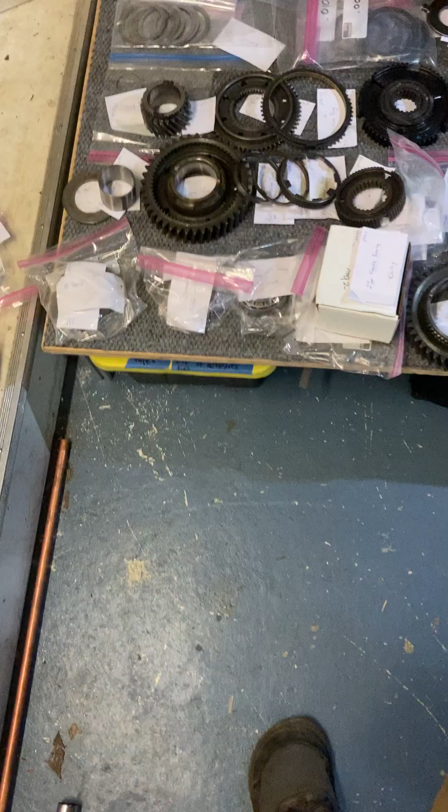Sorry, phone shut off. Okay.

This is the hub. That's the snap ring in there. Boom. Found it. You was lost. Now you're found. Main shaft bearing. Rear housing main shaft bearing. And that other thing says main shaft bearing race.

There we go. So I believe all four of these are different size bearings. And then main shaft bearing snap ring. Pretty thick snap ring. Now you need 3 more shift detents. Reverse sync hub detents.

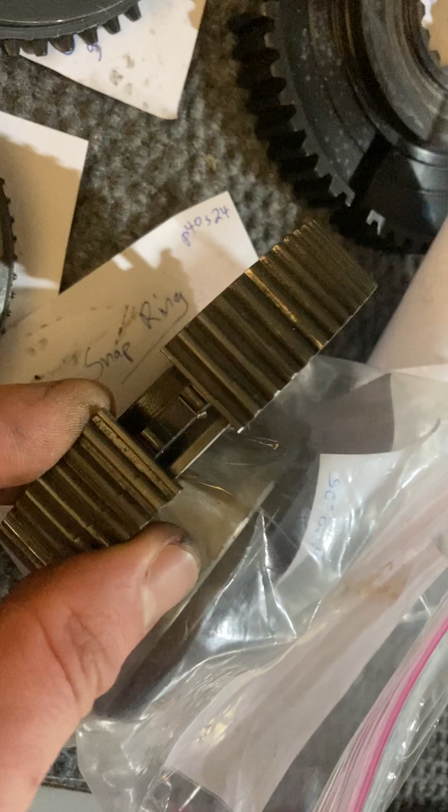They're different. They look different. They look like that. They're rectangles with little pushy balls, little spring balls on them. And those spring balls sit in there. Rectangles and spring balls. Okay. Reverse gear synchronizer sleeve. That's what it looks like.

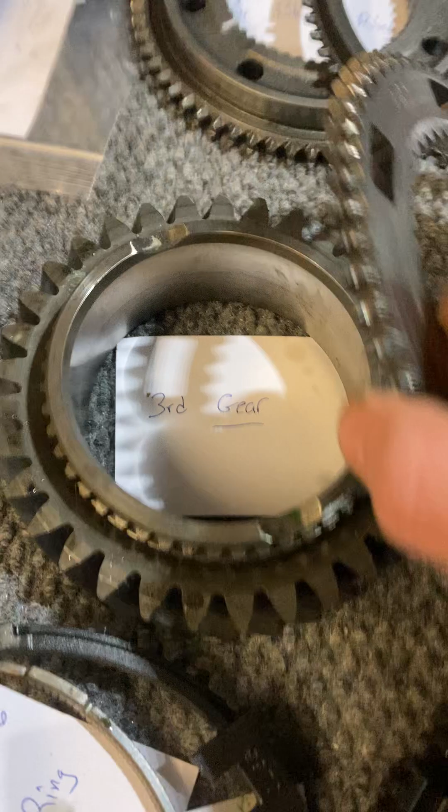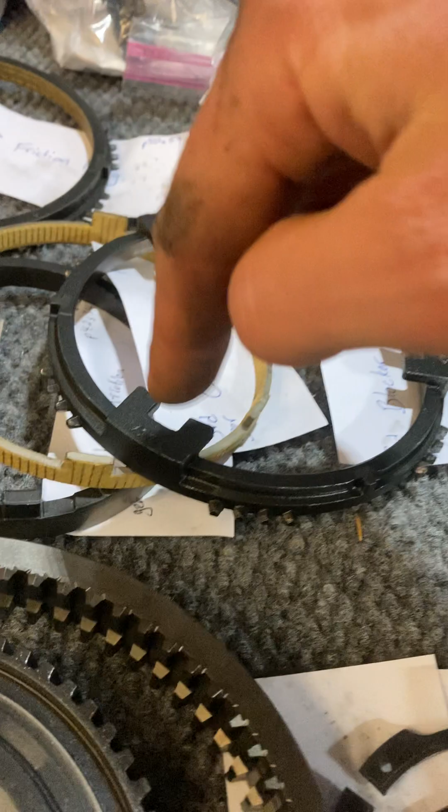Now we got 3rd gear. Now we're doing like 3/4. Boom, boom, 3/4, boom, boom. 3rd gear. 3rd gear stop ring. Inner friction ring. 3rd gear outer friction ring. Same as 4th gear outer friction ring. 3rd gear blocker ring. And on page 43, step 36.

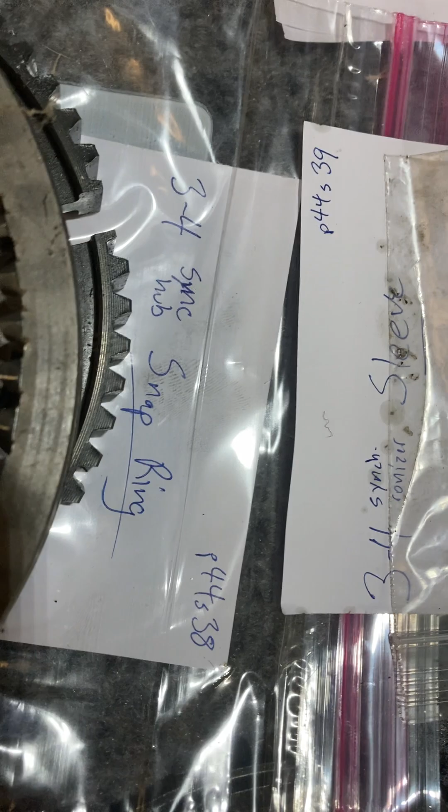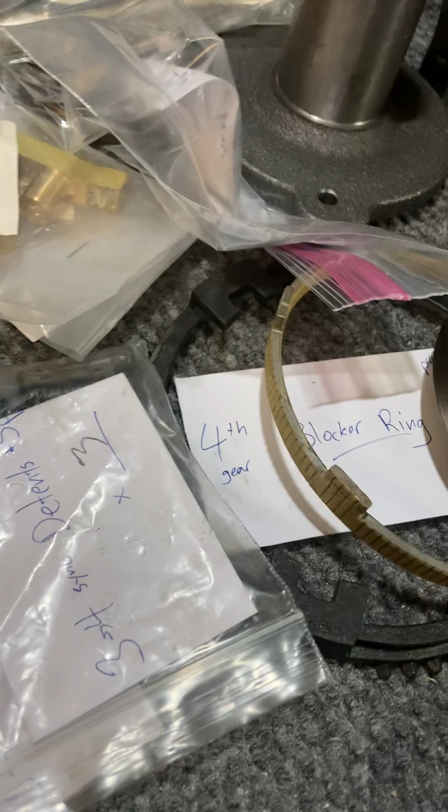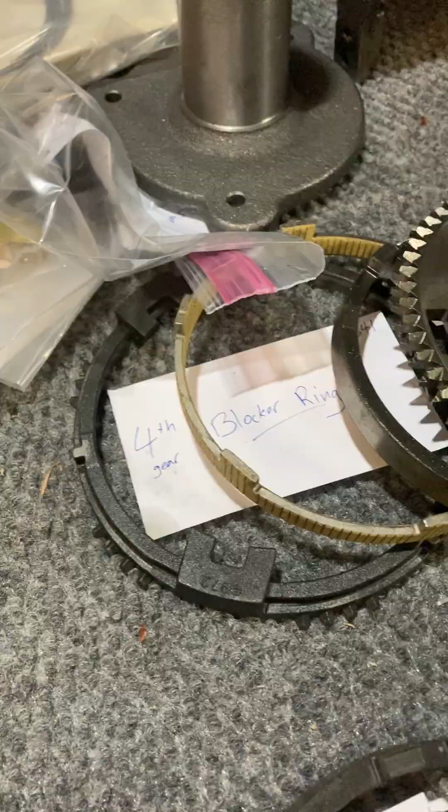Now we got 3 to 4 gear sleeve and hub. 3 to 4 gear sync hub. Oh, and that snap ring back there. There you go. Now we got 3 detents, the same ones you saw earlier for 1 to 2. 3 springs, 3 pushers. Sleeve.

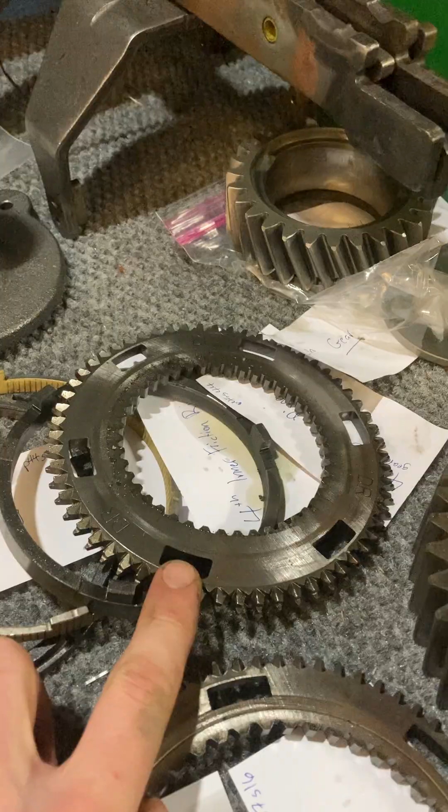Alright, now 4th gear. It's backwards, there's the gear over there. Smaller guy. Got that 4th gear thrust washer that I showed you earlier. And then it just says 4th gear. So we got blocker ring, outer friction ring, inner friction ring, stop ring. Now go back over here. Now we got a 4th gear snap ring.

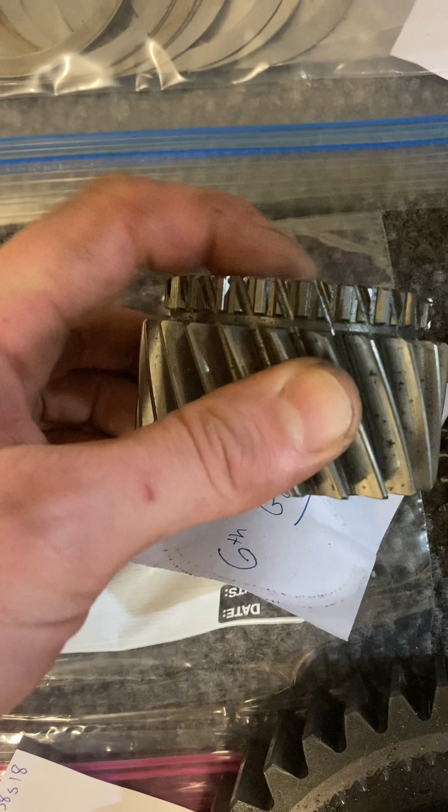Now we're going on to 6th gear. That is what 6th gear looks like. Kind of interesting how these, I think they're only used vertically, but because of the way they machined it, it's got these diagonal cuts. Could be stupid, but what's interesting about this one is, look at this one.

It's a different style. 6th gear friction ring. That friction ring sits on there. So instead of there being an inner friction ring, it's just a 6th gear stop ring, which is the inner friction ring. And you didn't know. Don't look for an inner friction ring. Woohoo! Almost got to buy.

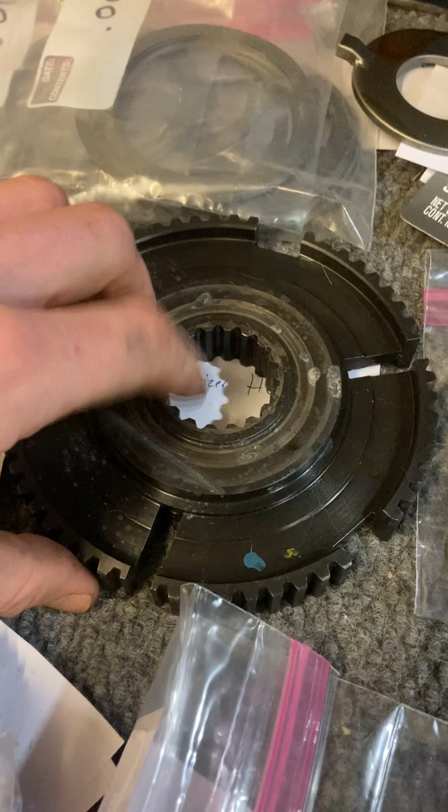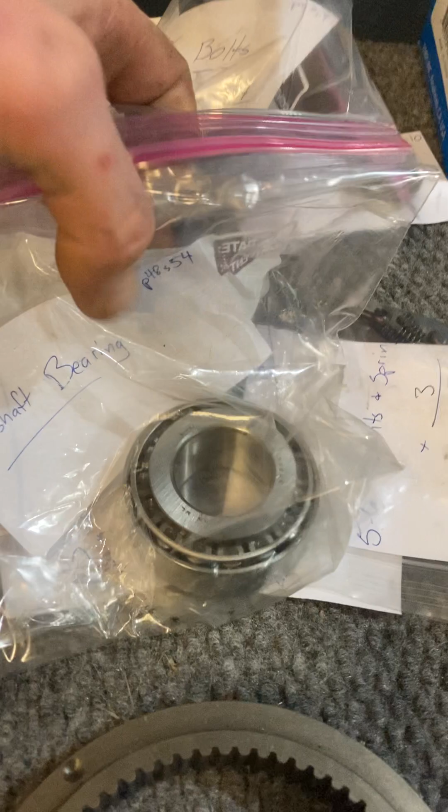Then we got this. 5-6 synchronizer hub. Skip on top and bottom. Then we got this, this is gonna be that synchronizer hub sleeve. But before you do that, we got main shaft bearing. Boom, right there. I think it's, no. Then you got a little snap ring for that guy.

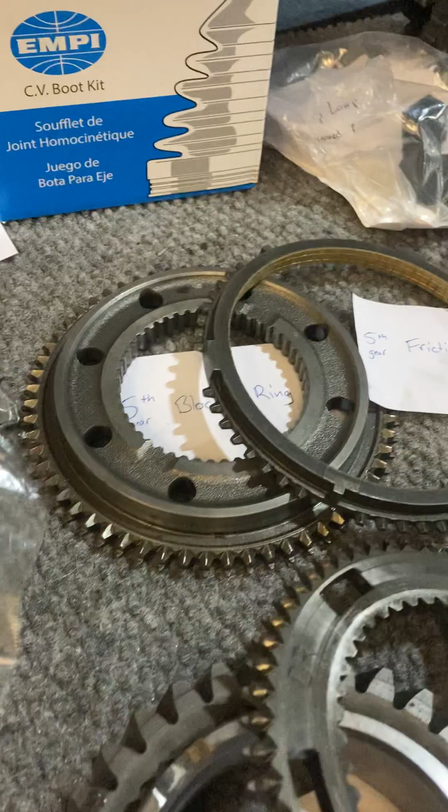And then 3 more detents. Same as 1 to 2 and 3 to 4. It just says sync sleeve. That's this guy. And then, alright, so 5th gear. So we're on the other side of the 5th gear thing. Got this guy, 5th gear blocker ring, which is also the inner friction ring.

And 5th gear friction ring, which should be the same as the 6th gear friction ring. Okay, same part. Now, output shaft seal. Rear housing output shaft seal. You only need 1 of them, I just have 2.

Right? Rear housing, output shaft seal. So, rear housing, that seal. That one right there. Output shaft. Okay. Reverse idler gear. Not that. That's the needle bearing. That's the reverse idler gear. You're gonna need one of those.

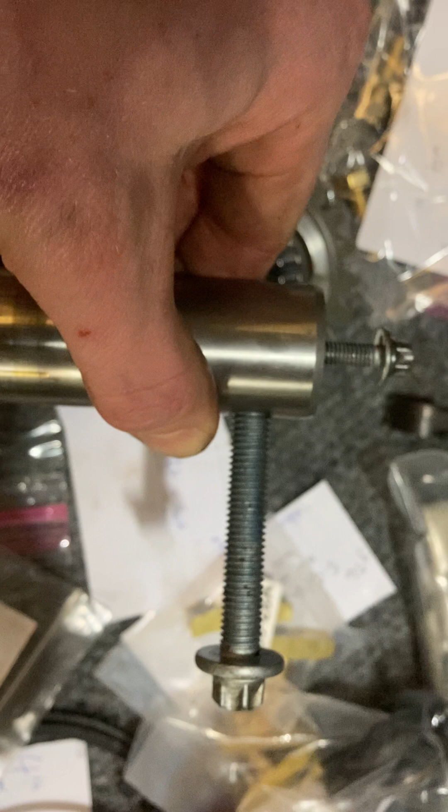Needle bearing. But I have another one that came in that kit, which I was missing all the other needle bearings, so not this one. And now we got reverse idler shaft bolt. Because that goes to the outside of the case. The top one is inside the case. This. That's where the reverse light sensor goes. This is probably that one right there.

That would be the 5 to 6 shift shoes that are on the rail and touch the sleeve. So mine didn't have them. That's my 5th gear rail. This is the input shaft retainer, which I didn't have. And I guess maybe get a cast iron one. The other ones are stamped steel, maybe. Recommended as a little upgrade. Upgraded input shaft retainer, eBay.

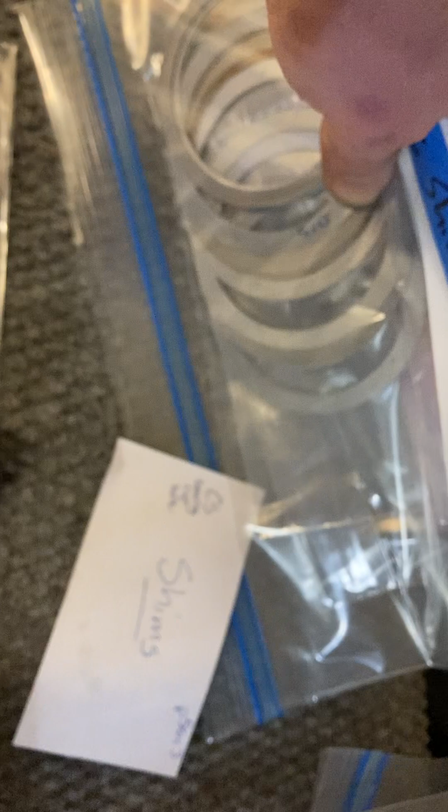We already showed those. Okay, last row. Shims. Got a shim in the front case with the counter shaft and the main shaft. This is that weird oil supply washer. It is in the book, page 56, section 5. Got it on eBay, I think.

Allstate gear. It's the gasket maker I'm going with, between the front housing and the rear housing. I guess gray Permatex is a little bit better for vibrations than black. They're both pretty good with oil and heat. Really good. You seem to like the right stuff. Got the 90-minute cure.

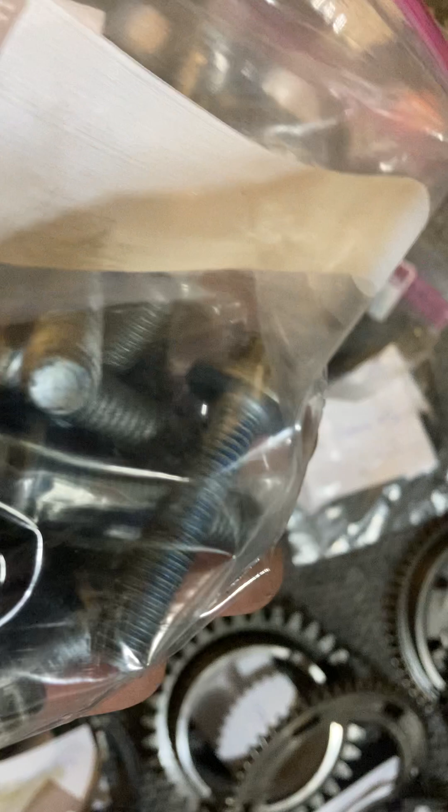Front to rear housing bolts. Times 14. They look like that. I'm sure they're just standard metric thread flange bolts, but almost all the bolts on this thing are like those 12 point star tops. So you need certain sockets.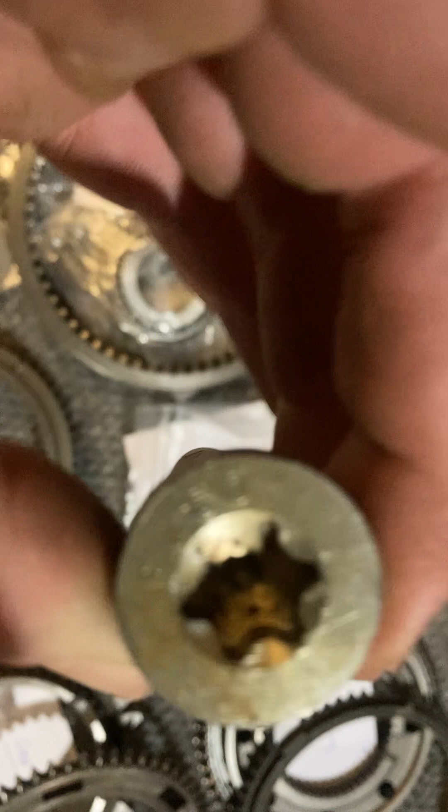This is a 5 to 6 shift fork. Pins, you need two. You need two O-rings for them. I have one O-ring that's bad, so I was going to go to the store. But they go there. Boom, baby. Okay.

Yep, need two. Okay, CV boot for the shift tower, because I guess these are shit. So a lot of people recommend this. Purchased on Amazon. What do we got? What do we got? Okay.

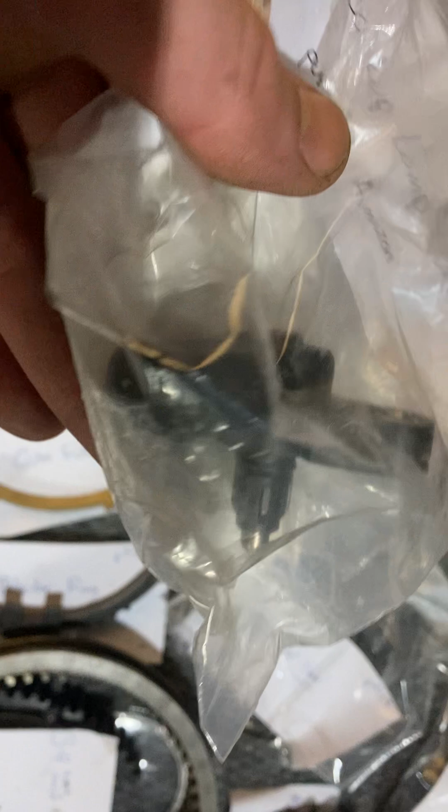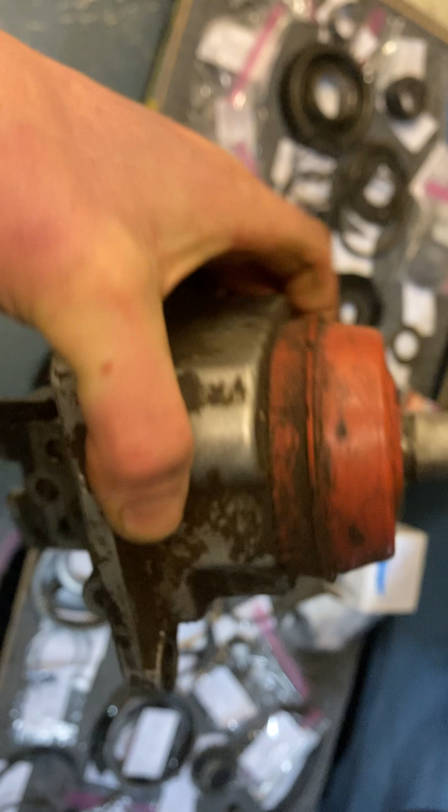So all you need is figure out the seals. Been a fucking pain in the pussy hole. So much information to use 2, 3, 4, whatever. Don't use this red one. The CV boot replaces the red one. And then there's these weird plastic and rubber cap, plastic top thing that you can buy, but it's expensive.

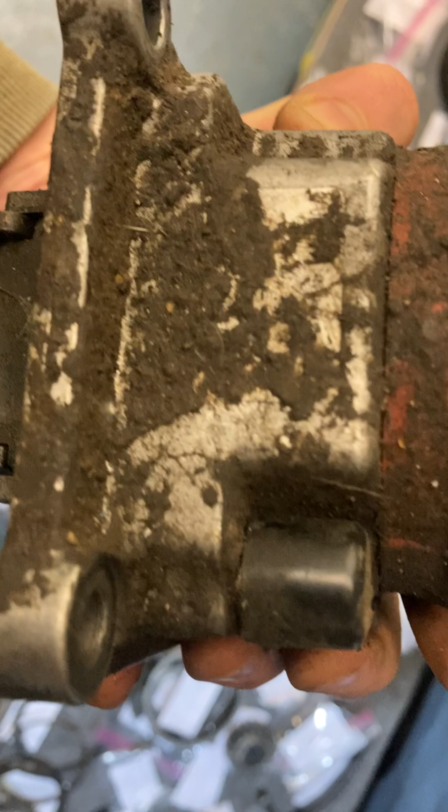And so I think that's a vent, and really those optional other ones prevent fumes from going up into the cab, I think. So instead of spending $65 on some glorified fucking cap, I'm just gonna make a flap, cut a hole in the flap of some thin rubber, and then just have that flap tight against the top and boing, just have it be a cap, I guess.

If you have any cool ideas, please let me know. Spitball. I was thinking maybe one of those old man canes with the sword that comes out, or maybe like an old hammer, maybe some tools I can pull off and use whenever I want. Okay, so this is the 5-6 shift rail.

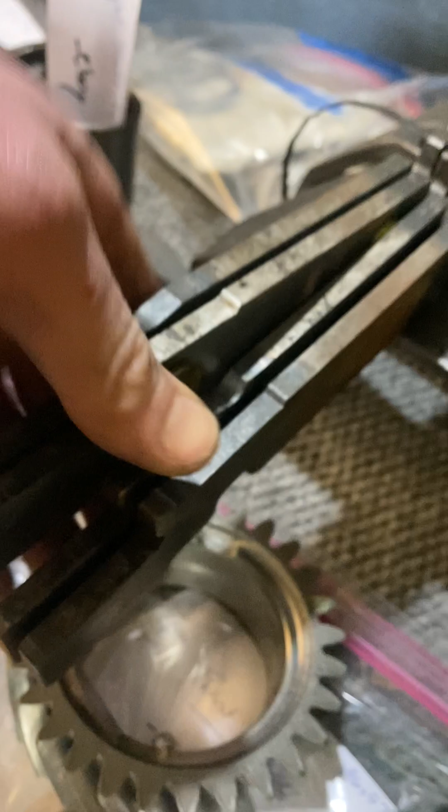Here we got, I think it's just random shims I got. That's not relevant. Those are the shift rails. There's 4 of them. You can buy new thingies. I did not. That looked okay. Okay, I think that's all the parts I got laid out there. We got main shaft, boing, counter shaft. That one does not have the 5-6 cluster on it.

You maybe need a 100-ton press or less. If you heat it, cool it, I don't know. I was gonna go to a machine shop or auto shop around here and ask them to do it. This is a fixture I happen to have. Pretty cool. I think it's in the manual at the end. Different tools. It holds it on one side, and that is different size, but the bottom, you flip it over, holds it. Pretty neat.

Other things you're gonna need is, you see these 2 roller things up top? You got those 2 and 2 more back there. I don't know what part number those are. Luckily I had them. That guide, make sure you have that. Has races in it, but that should come with your bearing kit. Races. You need PTO covers. Adapter plate, obviously.

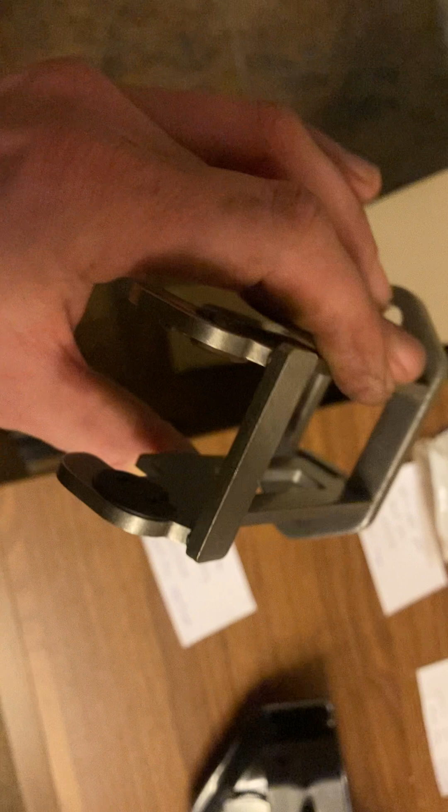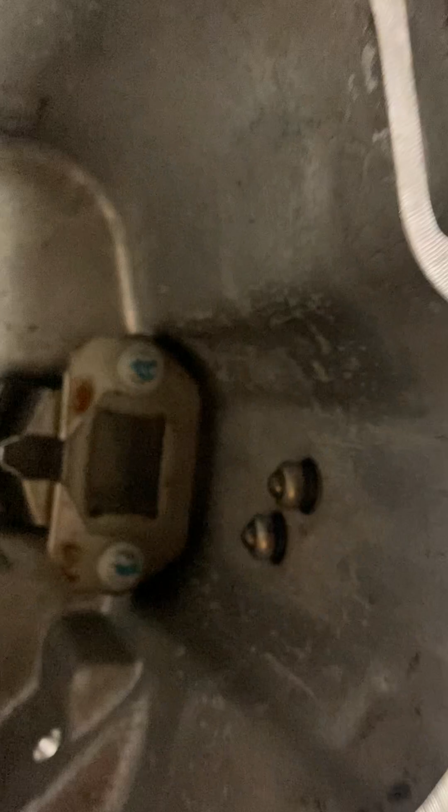Okay, here's other parts that were not necessarily in the manual. This is the opposite side for the shift rails to go into. They go into the front, I think. I think I have the back one. Shift rail in front housing, part number, ordered from Detroit Mopar. For some reason I don't have that. It's just like that's in the back. Didn't have it up there. $270. But thank you for having it, Detroit Mopar. I appreciate you.

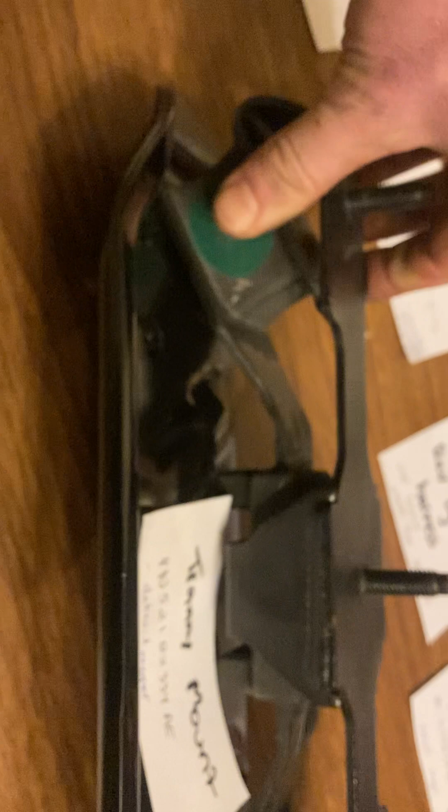Then I got a tranny mount. If you're doing the conversion from the first gen, this might be adaptable onto our manual cross member. When you get it, you can just get this rubber thing with the metal on it, but there's different versions that have this, and I think, well, could have made it, but whatever. That's what I ended up getting. I'll let you know if it don't work. There's like a bunch of different options.

I got bell housing to adapter plate dowel pins, part number, Detroit Mopar, 2 of them. I didn't have them. Alignment pins. All right, case alignment pins, that's what I was talking about, but from Torque King. They canceled, they couldn't find them. There's a reverse light electrical harness. That's the part number, ordered from Rock Auto.

It's just got this stupid plastic thing so it can make a nice seal with your reverse light thing and dirt don't get in there. Expensive, but less problems down the line. No mud problems. That's the Rock Auto part for that thing I just showed you. Unfortunately, it don't work. Allstate Gear, eBay. That's where I got that shit.

And then this is Detroit Mopar. Expensive. Drain plug. Probably just go in your parts store. Maybe I'll check the threads for you guys, because I couldn't figure out what threads there were.

Alright. And then we got tools that you need. Some are for assembly, some are for removal. I'll show you what some of them look like. Alright, puller with these things. Looks like this.

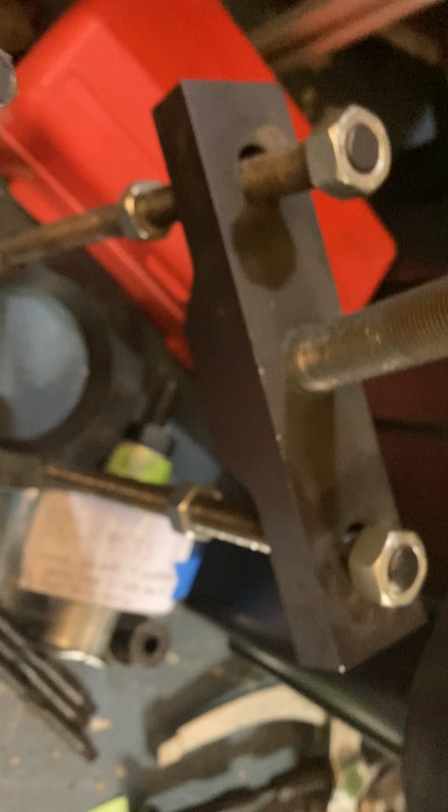293A. Yep. 293A PA2. Then it has these guys. But I only have 2 of them, not 4 of them. They sit in here and pull off your pilot bearing. I don't have the handle. I have some of that shit. It's this thing with these rods. You can replace this, the rods. Don't know if I need it.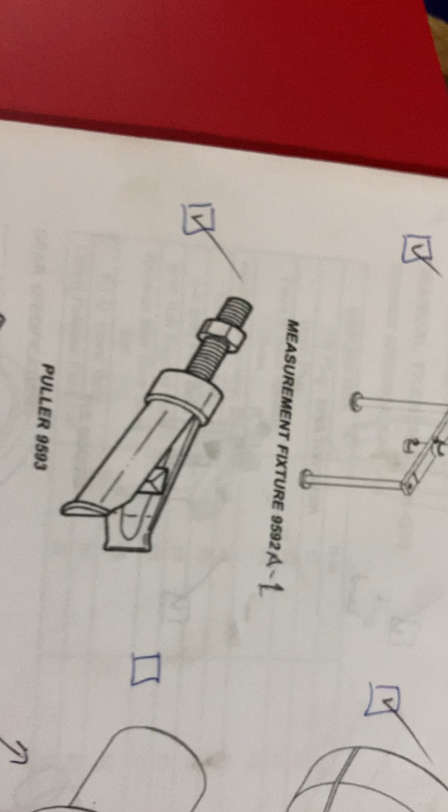Got that. It's that thing. That thing. Got an off brand. Should work. Don't got that, but I got that box of races over there. Hopefully I don't need that, or that, because I got a box of just generic races to hammer in. That weird thing, pulling races out of the case. Again, off brand. Hopefully it works. Put it in there and then these spread. Push it.

Those only if you're disassembling. But we'll put those things down there. Should be good without them. That's that fixture I was talking about.

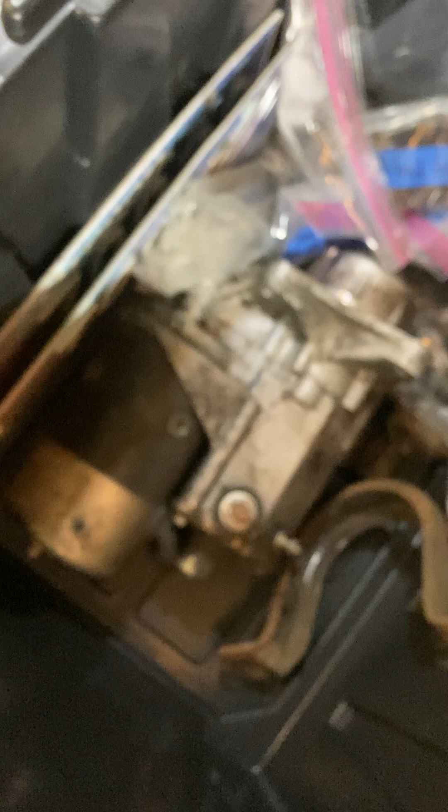Now if you're going to convert from a first gen to a G56, second gen adapter plate, second gen starter, maybe you're going to get like a rebuild kit for that. I did new brushes, solenoid, whatever, contacts on the first starter from I think Larry B. It was great. That's the part number. Make sure you get like, I think the early manual one. I don't even know if I can read that. A few other things.

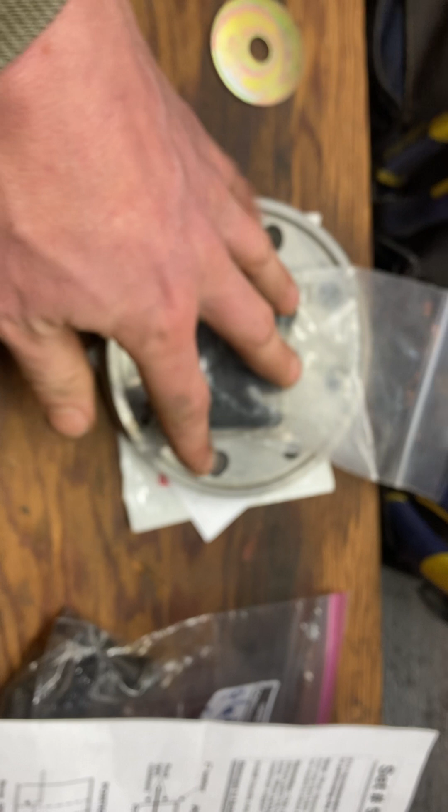I got a NV5600 flywheel. Belair sells this kit so you can use it for the G56 spacer bolts. Then what's cool is you don't need the clutch for G56 only. You can use them for NV4500 that's got the 1 3/8 or the NV5600, so you have more flexibility on what transmissions you run in the future without changing your clutch.

The other things while you're in there you might be interested in doing is get the rear main seal. It was that part number. I started with the speedy sleeve thinking that I had some wear, but then I fucked it up. That one's a lot harder to install, so if you don't have wear I recommend just going with the other one, regular black one.

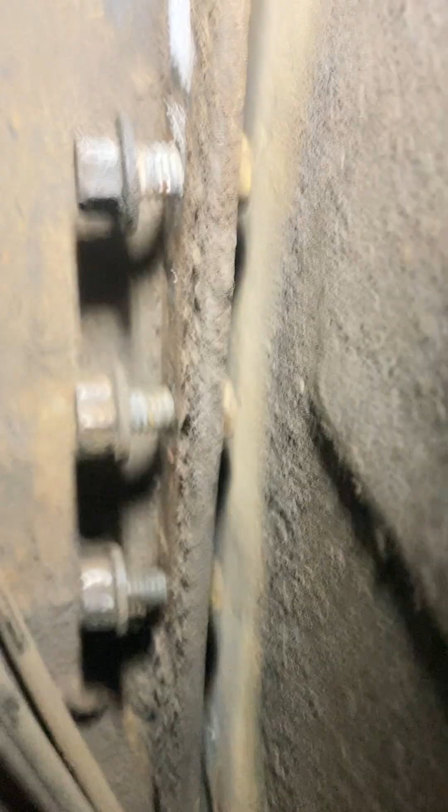Of course everyone likes looking at them. There we go. First gen. Bed's off over there. Gonna do a utility bed. But what do we got? Okay. Maybe I'm gonna paint everything, whatever. So if you don't have a 1.5 inch body lift, it's gonna be hard to get those bolts out. So I'm gonna do a body lift on this thing.

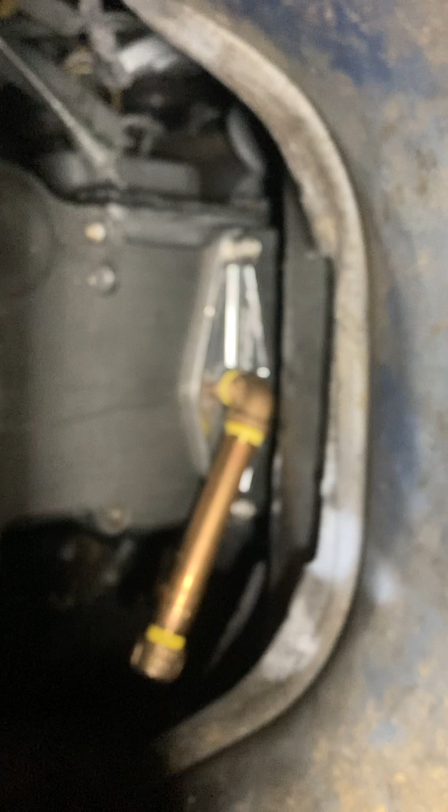Do rear main seal, clean the housing. That heating something, rear freeze plug, it had a tap for a hole for a pipe thing. I didn't know if I wanted to run a bypass, filter, pressure or temperature, thermostat. So I just ran that pipe so in the future I don't have to pull the tranny to do whatever I want to do.

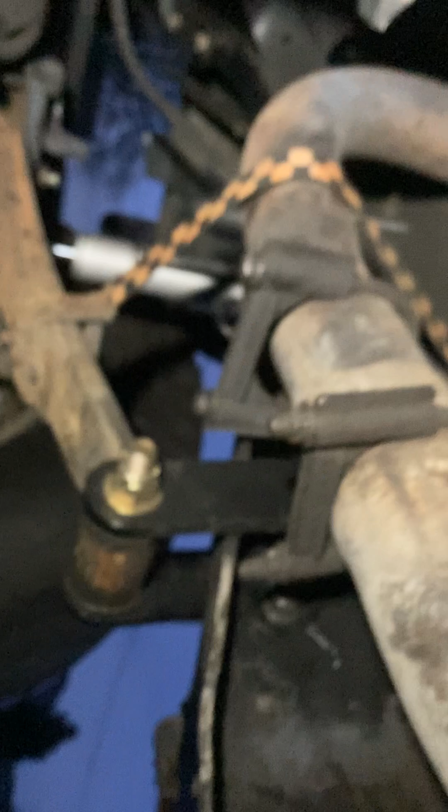You gotta do all new U-joints on these things. Come on, just replace your U-joints on your drive shafts for safety, I guess. I don't know. There might be a problem with the exhaust being too close, but because I want to run a second fuel tank on the right side of the drive shaft, I am going to put it outboard of the frame.

And what I'm thinking is instead of getting new pieces, I'll start by using just the end of it. Got some nice bends. To cut and weld something up. This hoopty doopty. Right angle there. Big ol' freaking hoopty doopty there. Pop it outboard of the frame, and then I'm gonna make a second fuel tank there for veggie oil. I don't want to do the rear Ramcharger fuel tank because I want to put like 50 gallons of fresh water there. Then I'll just have the tire on the back bumper.

Oh, dude, that is the compressed air tank bumper. Oh man, the dude Tej Wong up in Seattle, one of the first gen communities on the internet, traded me for my regular bumper. So stoked. Fuck yeah. Such a hero. And then we met. So heavy. Can't focus for the shit.

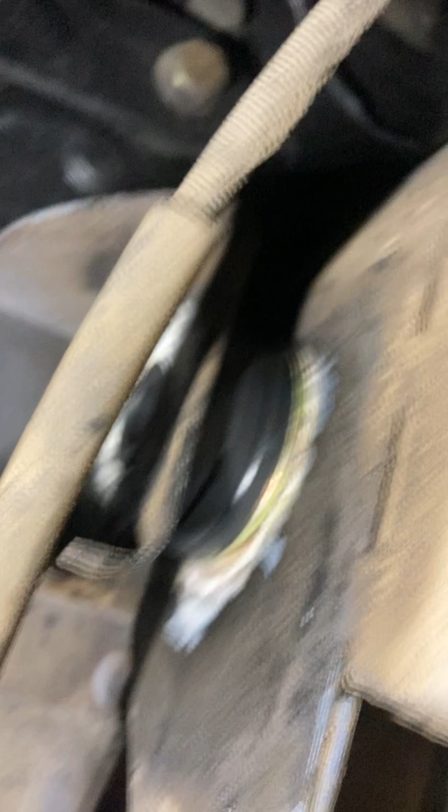Okay, utility bed's going on. What I'm gonna do for the body lift to get that room is I just bought this aluminum, we got this place with the recycled metal that you can buy. It's all the same thickness, just 1.5 inches. And I'm just gonna drill holes in it, run longer bolts, and put that in between. So that's not even bolted right now because I'm doing it right now, but I want to paint it. Put that above it or below it. You know, that one, that rear one, and then under the radiator. Might have to make a new fan shroud, we'll see. That might be it.

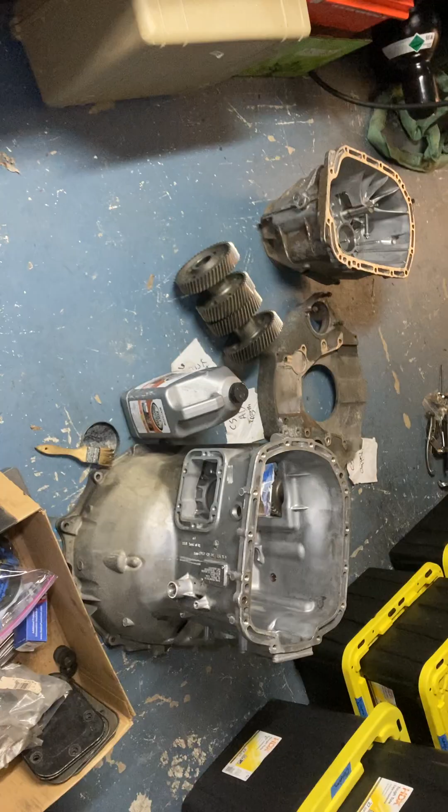Oh, one other thing you might want to do. This thing, you're gonna have to change your drive shaft lengths. And I have a Dana 80 sitting around. So that one's got a longer housing too on it. So instead of fixing my drive shafts twice, do it at the same time, I guess. All this just because I got a free G56. Could have just fixed the NV4500. But that's it now. So, see if there's anything I forgot.

Paula! Hey dog, what's up? You good dog? Where you been? What's up? You funny little dog? Good dog. Yeah, you good dog.